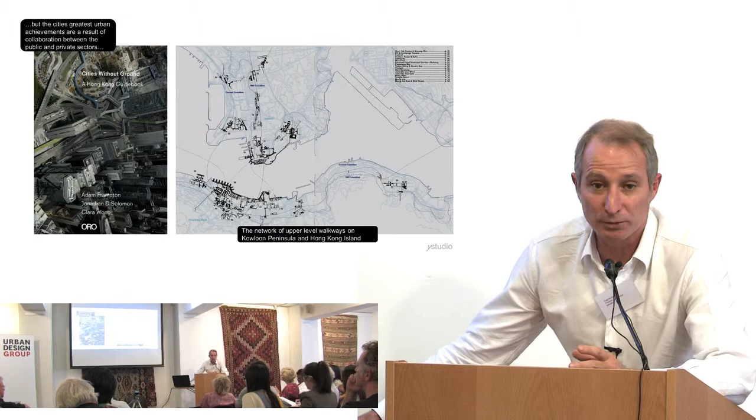And it creates whole different kinds of public realm. This is actually the government part of the network—the mid-levels escalator going up the mountain, really an indispensable adjunct to the pedestrian movement system, given the steep terrain.

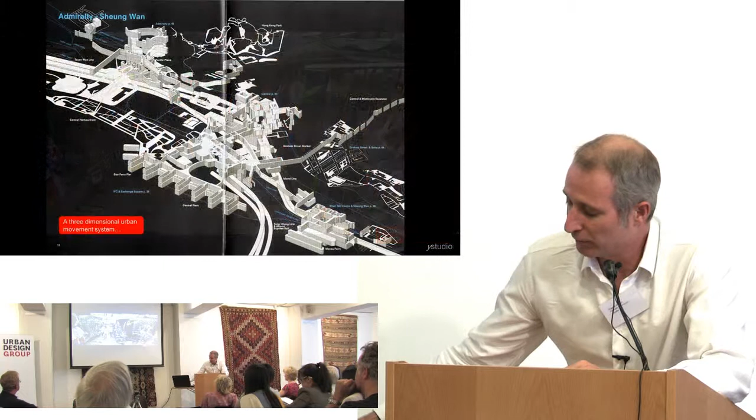It's interesting to reflect that at certain densities, these three-dimensional networks actually don't detract from the wonderful urbanism. People often say there's no public realm in places like Hong Kong and other Asian cities, but in fact some of the best streets are to be found in Chinese cities. Perhaps not the best squares or the best gardens and so on, but you get these wonderful streets—that's Pottinger Street, just near the mid-level escalator in Central.

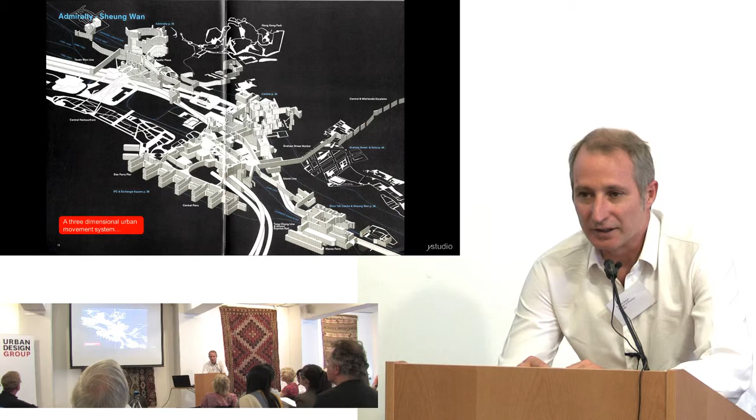That's again another wonderful diagram from the guys at University of Hong Kong, showing the tunnels, the at-grade connections, the overhead connections, and it does give you a different kind of public realm. The image on the left is the IFC, the very glamorous shopping centre by, I think, Cesar Pelli—he certainly designed the towers above it. Those have actually become cultural and exhibition spaces, as well as places that form part of a retail plan.

On the right is an exhibition last year by Rogers Stirk Harbour, and they don't even have an office in Hong Kong, but you do get these interesting cultural events happening in this three-dimensional environment. It's an interesting inversion of what's happening here, where the South Bank is becoming more commercial, becoming a work environment. I'm an independent consultant and I use the South Bank as part of my workspace. It's interesting how these spaces work.

The other thing that makes the city apart - I started with Hong Kong because in many ways other Chinese cities look at Hong Kong as what China might be in the future. This is what one might call infrastructure intensive urbanism. The detractors call it an MTR fortress, but at a certain scale, this development on Victoria Harbour has so many ingredients: cultural assets, sporting environments, medical facilities, education, the usual offices and 6-star hotels, and people live there.

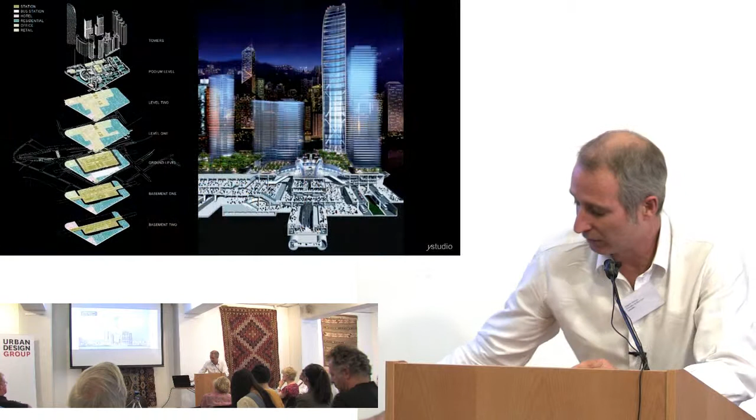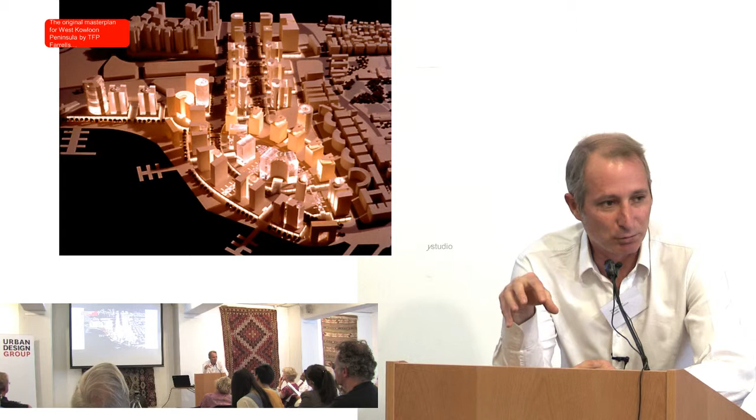Unlike in the UK, living on top of infrastructure attracts a huge premium, so these are extremely high value apartments which none of us can afford. The values there are easily what the very highest values in London would be. These are some wonderful drawings from the guys at Farrells showing how that's all put together as a three-dimensional piece based on various kinds of infrastructure. Interestingly, originally the whole model for West Kowloon was these podia connected by underground and overground links, at 20 meters up above ground.

I think the attitude has changed somewhat, interestingly, in response to public opinion. Wherever you work in China, you have to be aware of what people think, particularly of significant major developments. Certainly in Hong Kong, but increasingly in places like Shanghai and Beijing, the first-tier cities, government does carefully listen when it comes up against opposition. I think it has no choice. Certainly in Hong Kong, the idea that Victoria Harbour gets occupied by very large-scale development has gone out of public favour, and it's very much about public access along the water's edge.

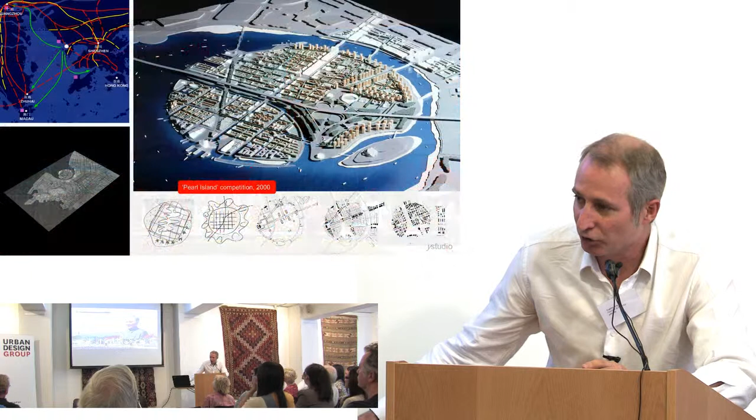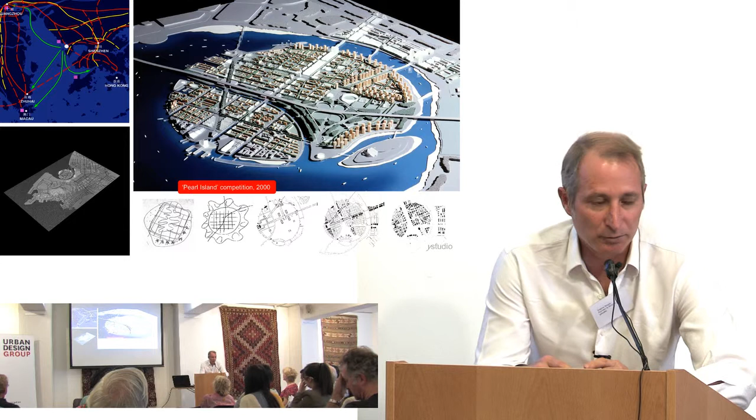And this was a competition that I led at Farrells. It was almost the first thing I did in China, for a new settlement in Shenzhen at the western extremity. The idea here was that this would be like a new sort of high-quality development on the edge, and we were helped by the engineers who brought you Chek Lap Kok Airport to look at all the hydrodynamics and so on.

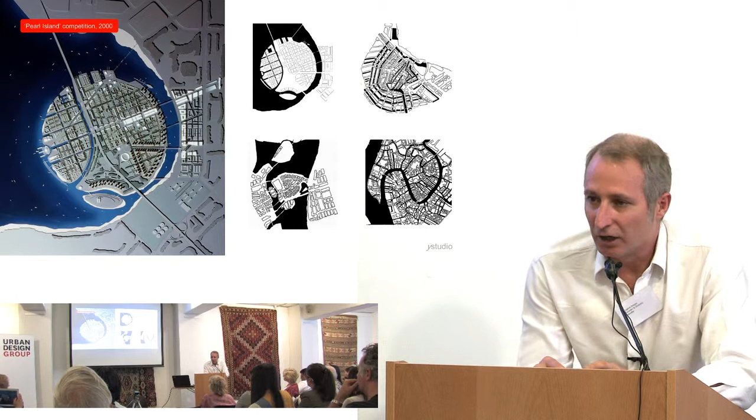In competition with people like Jerde, an American practice, and DCM from Australasia, who used to be very big out there, we came up with this urban strategy for this settlement. It was actually just a reclamation project, but we thought, why not detach it and create an island?

So where our little island was has become a container port in this huge industrial area. That's probably the right thing to have happened because it's on the industrial side of Shenzhen. The lesson there is, one, that the urban revolution is taking place now as we speak, and secondly, sometimes you get asked to do things as government tests policy and ideas by inviting international consultants to come up with propositions for sites.

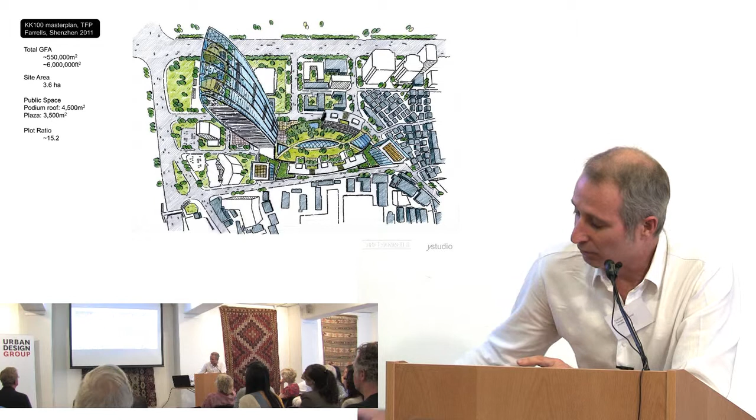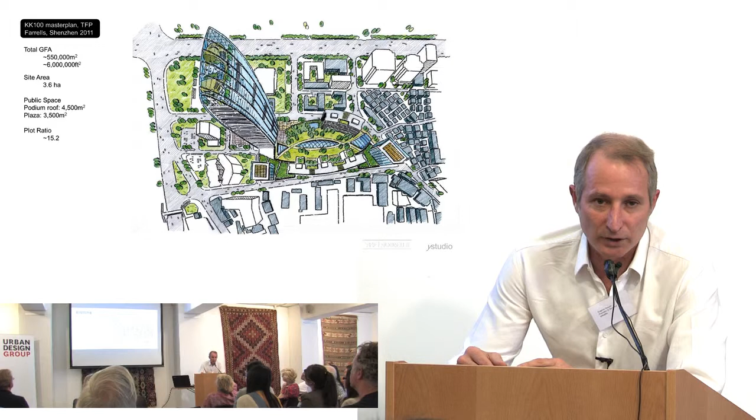But I think the real achievement is in the urban design. You have a very high density development - I think the floor area ratio is about 15, which is about 4 or 5 times what it is in central London, the West End. But it actually sits very comfortably in its surroundings, and a lot of that is to do with the clever retail planning and the way in which shopping malls can be successful urban entities.

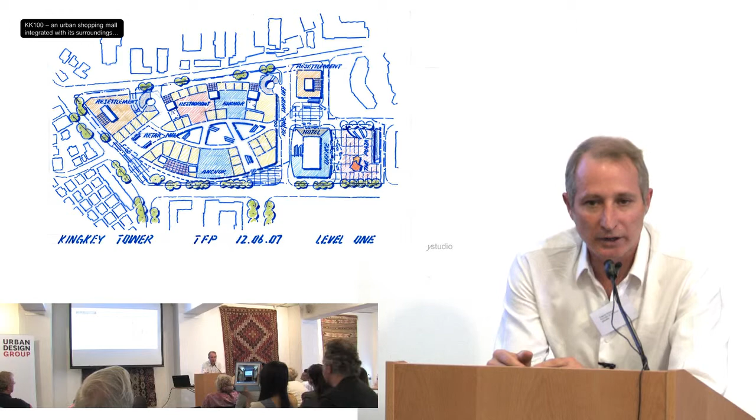I was showing some guys from China around London 4 or 5 weeks ago, and they just laughed when they saw Stratford. They said, where's everything? Oh, there's a shopping centre over the bridge over there. It's just like a model, I think, that we can learn from, not apply directly, but there are ingredients that are applicable here in the UK.

What's quite interesting in China is that a lot of the shops - this doesn't tend to happen in the UK - face the street, particularly the high-end brands, because their customers do not want to go up escalators. They want to pull up outside, go into the Burberry shop or whatever it might be, get picked up and disappear. They do not want to go into that maze. It's actually quite interesting from an urban point of view, because you do have double-sided shops in shopping malls.